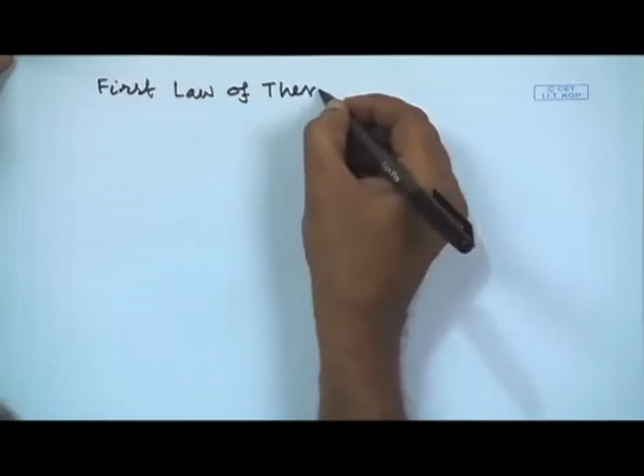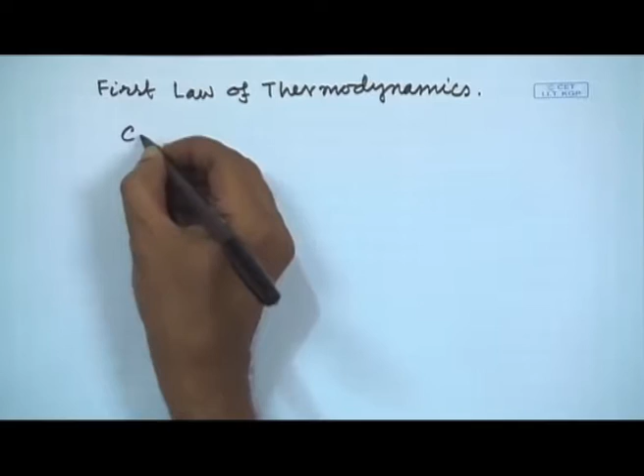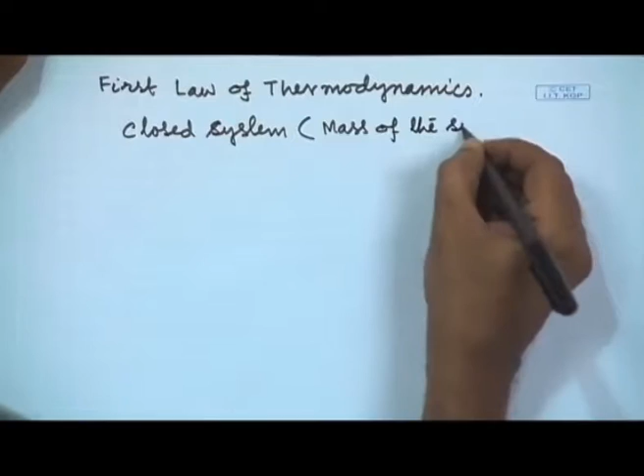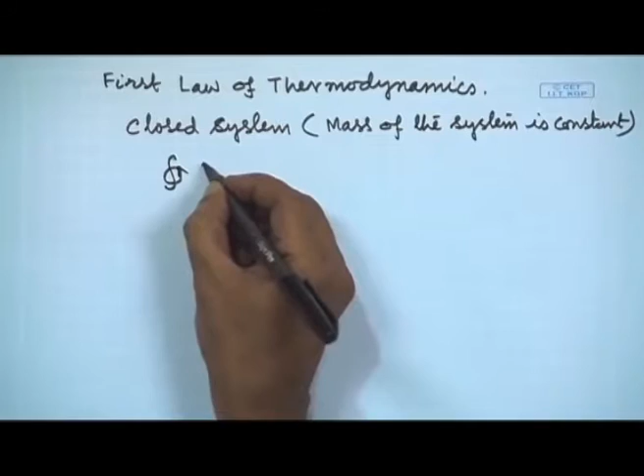First law of thermodynamics - first let us write the first law of thermodynamics for a closed system. For the closed system, the mass of the system is constant, because no mass can enter the system or no mass can leave the system. And then for a cyclic process, we can write: cyclic integral of heat transfer is equal to cyclic integral of work transfer. Q is heat and W is work.

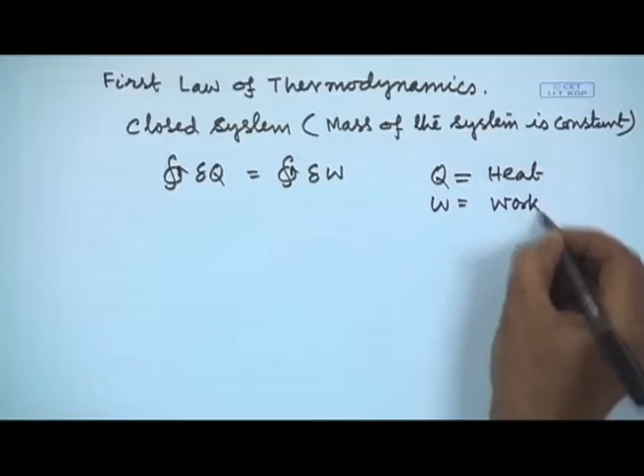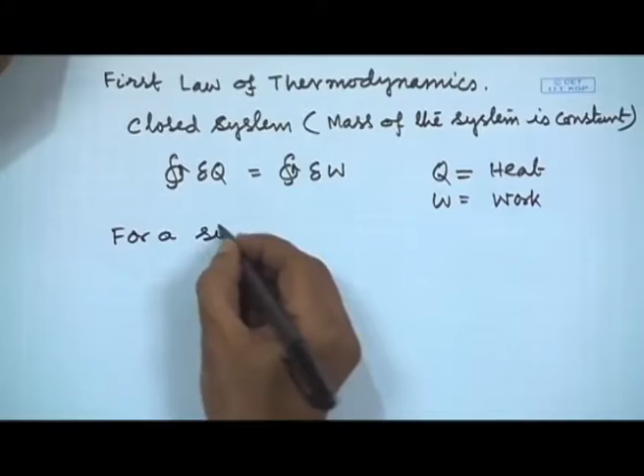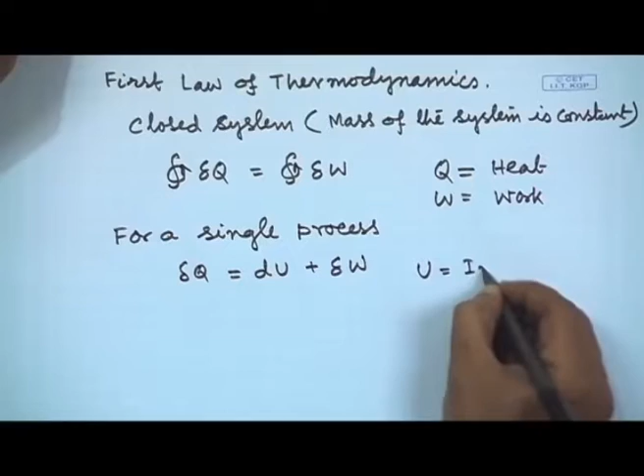If we take a single process, not a cyclic process, but a single process, in differential form we can write dq is equal to du plus dw, where u I have told is internal energy. And this is in the differential form.

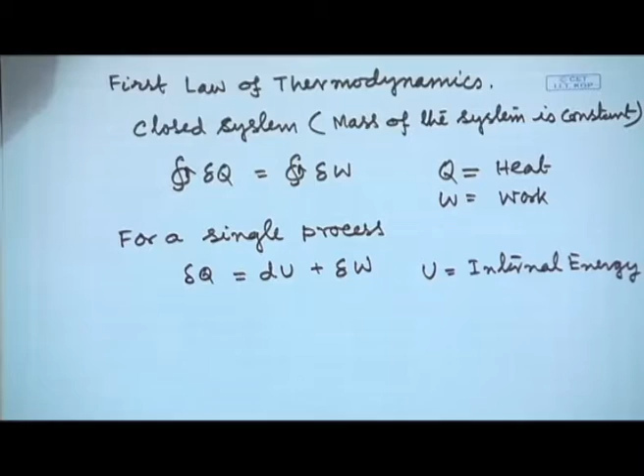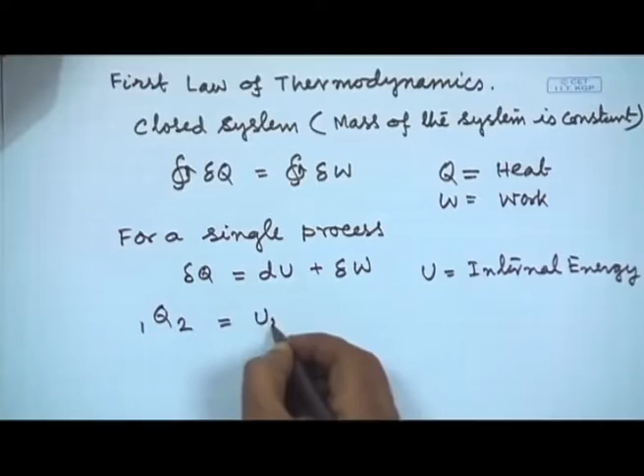If we consider a change of state from 1 to 2, one can write q 1 to 2 is equal to u 2 minus u 1 plus w 1 to 2. So here you see the difference. Here we have written q 1 to 2 to indicate the heat transfer during the change of state for the system from state 1 to state 2. Similarly, W 1 to 2 is the work transfer during the change of state for the system from 1 to 2, whereas U 2 is the internal energy of the system at state 2, U 1 is the internal energy of the system at state 1.

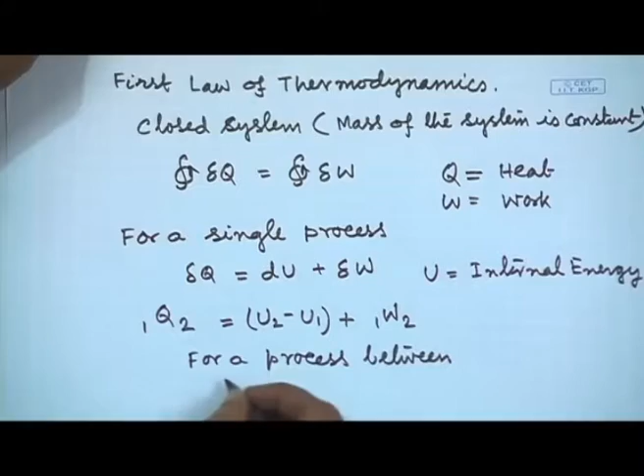So as U, the internal energy, is a property, we can write U 2 minus U 1 for a process undergoing between state 1 and 2, but as Q and W are path functions, we have to write Q 1 to 2 and W 1 to 2. So this particular equation is for a process between state points one to 2.

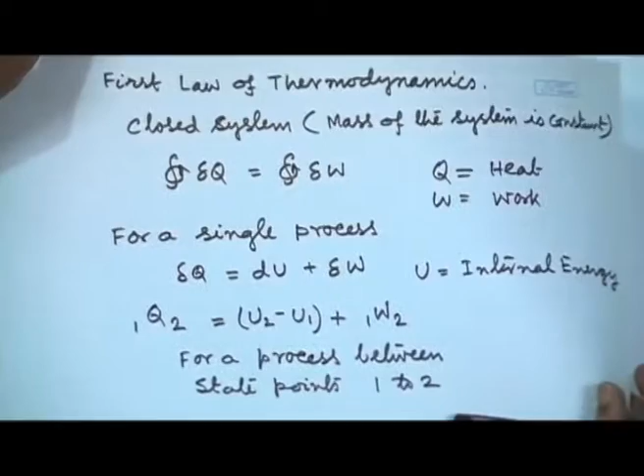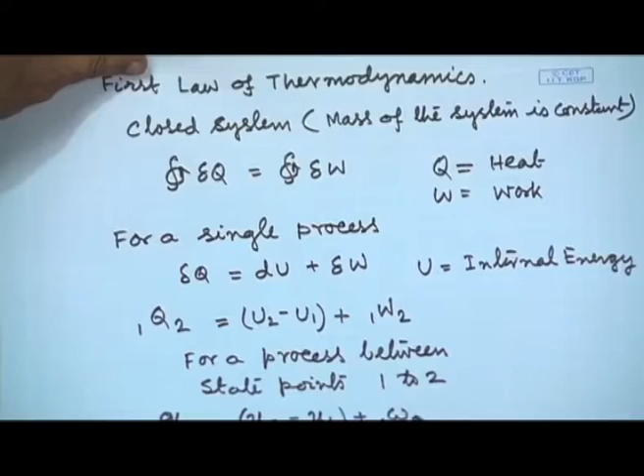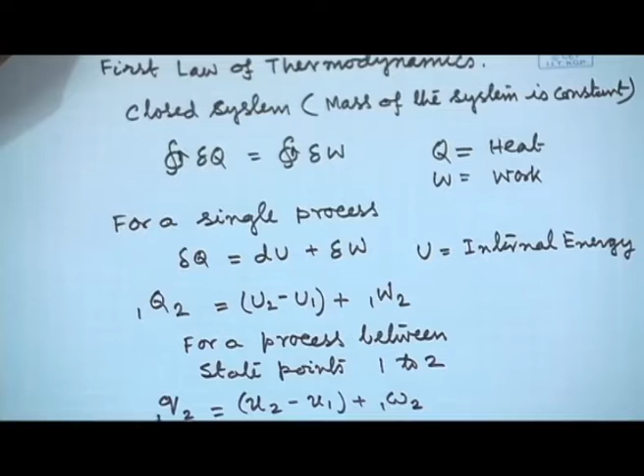We can write this equation also in terms of mass, as the mass of the system remains constant. So we can write per unit mass: q 1 to 2 is equal to u 2 minus u 1 plus w 1 to 2, where q and w are small letters denoting the amount of heat transfer per unit mass and amount of work transfer per unit mass, whereas U2 is the energy at state 2 per unit mass and U1 is the internal energy of the system per unit mass at state 1. So this is for a closed system or a system with a fixed mass.

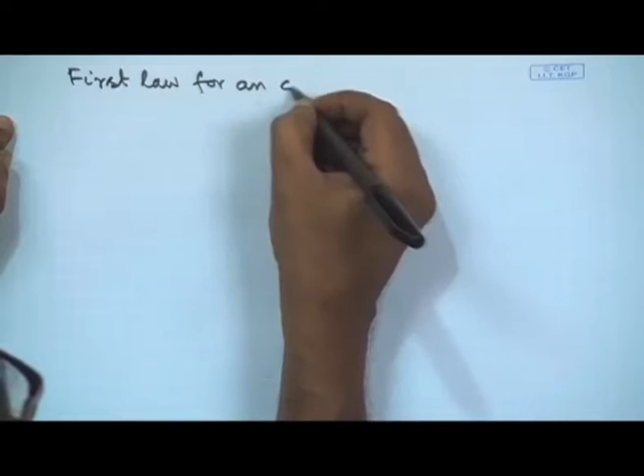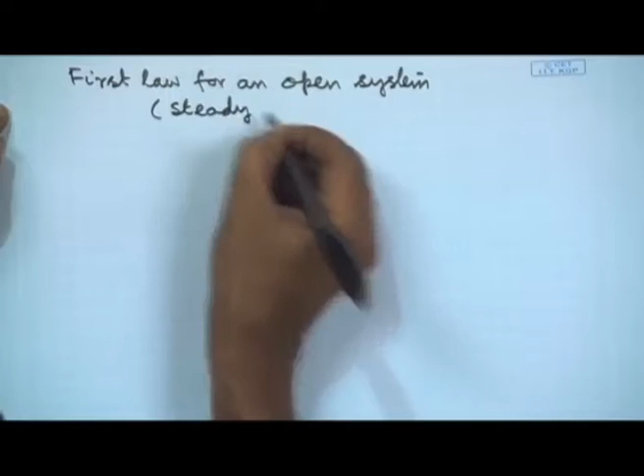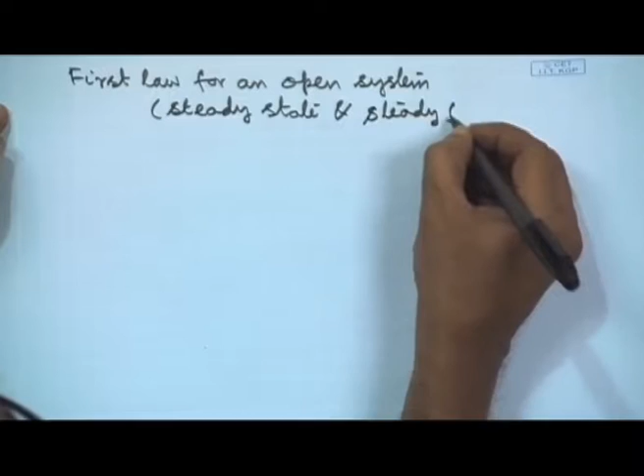Now, also we have written this equation for an open system - first law for an open system. Let me write it for steady state and steady flow. Again, I like to stress that steady state and steady flow is the most common kind of condition in most industrial situations. There are situations where there will be change of flow with time, change of state with time, but in general most industrial systems operate under steady state. We want to do the analysis under steady state, and so we are writing the equation for steady state.

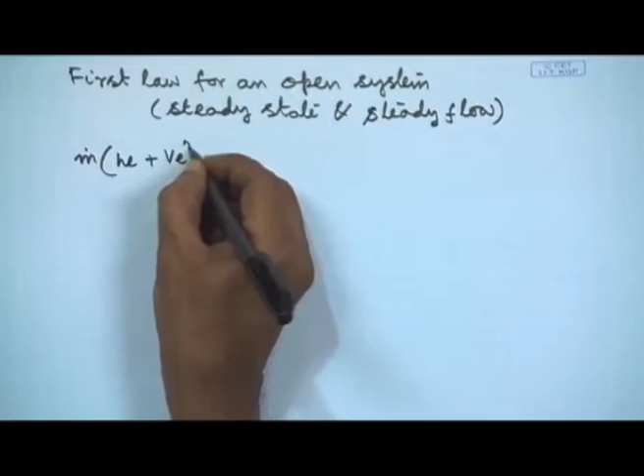And we can write: m dot times (H E plus V E squared by 2 plus G Z E), that is equal to m dot times (H I plus V I squared by 2 plus G Z I) plus Q dot minus W dot. Let me explain each of the terms.

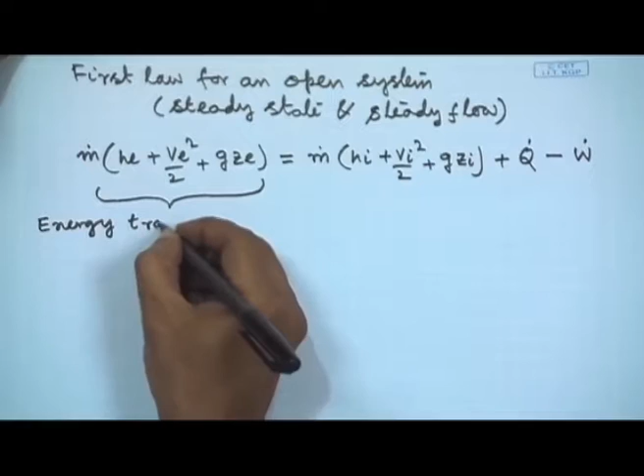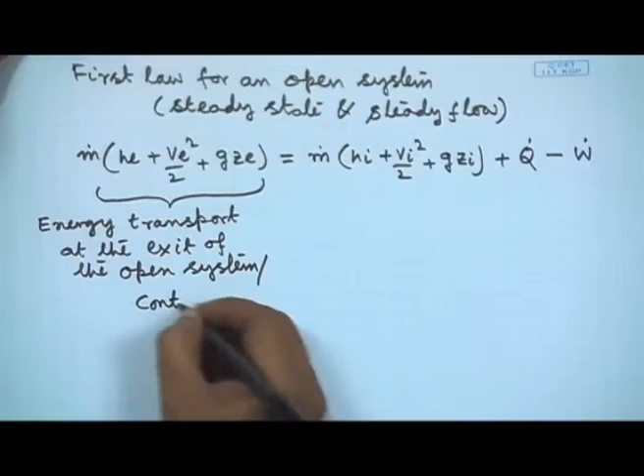The left hand side we have got energy transport at the exit of the open system, which is also known as control volume. This is energy transport at the entry of the control volume, short form CV.

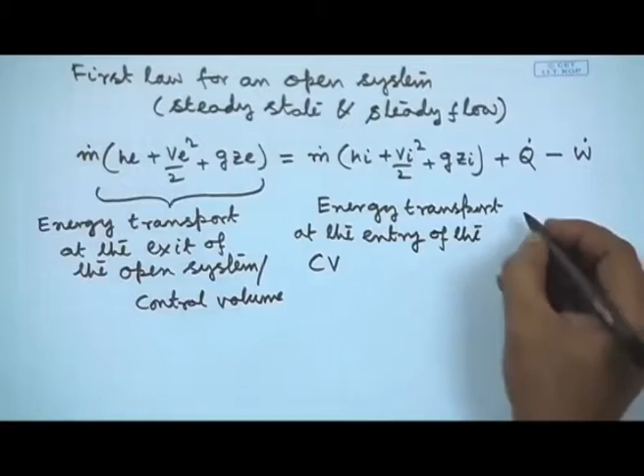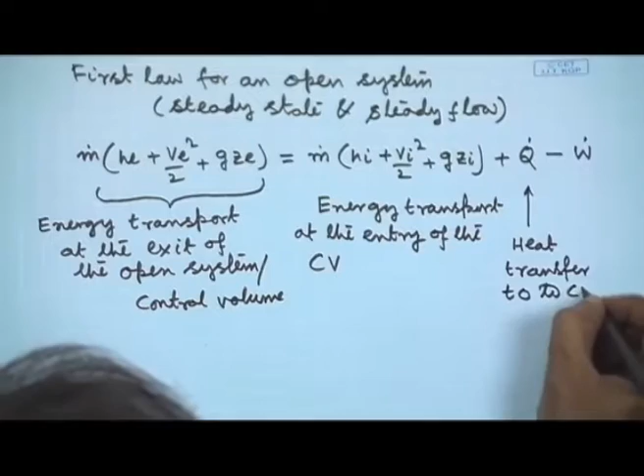Heat transfer to the CV, and this one, work done by the CV.

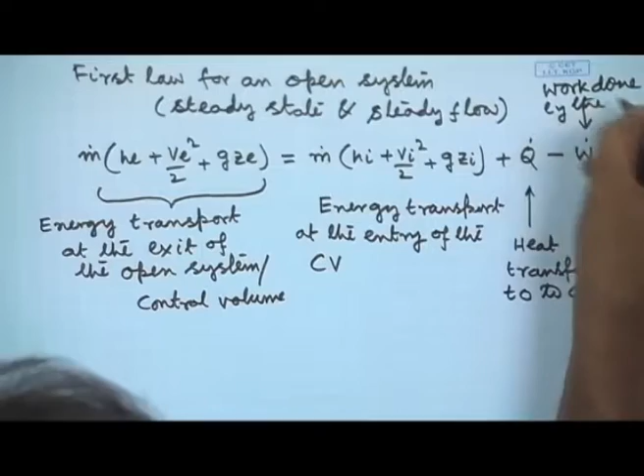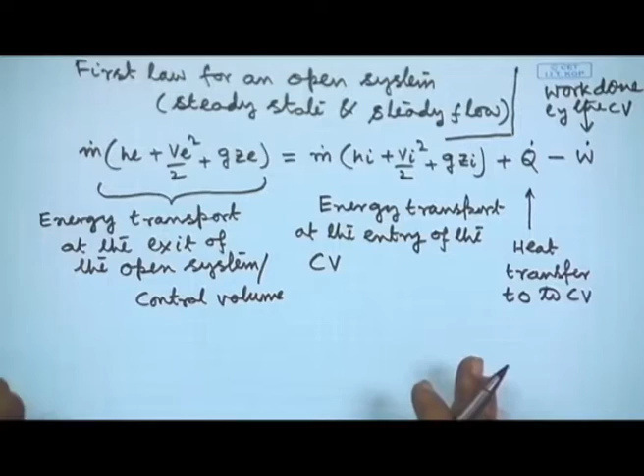So you see we are getting some sort of a balance of energy. Basically, we have to appreciate that this is a rate equation and we are getting some sort of a balance. On the left hand side, we have the rate of energy transport at the exit of the open system, that is equal to the rate of energy transport at the entry of the control volume or open system, plus the rate of heat transfer to the control volume, minus the rate of work done by the control volume. So this is how one can express the first law of thermodynamics for an open system or for a control volume.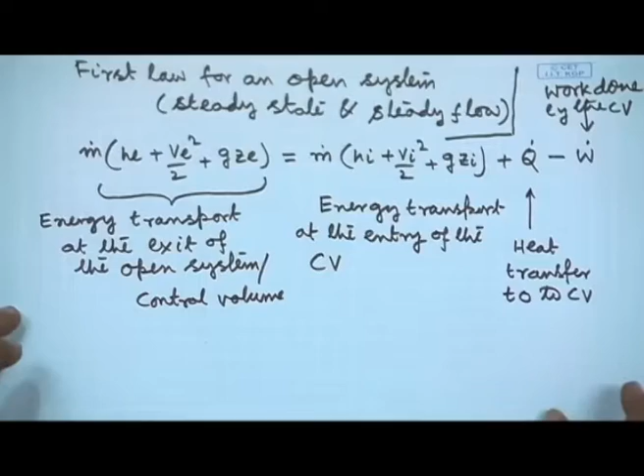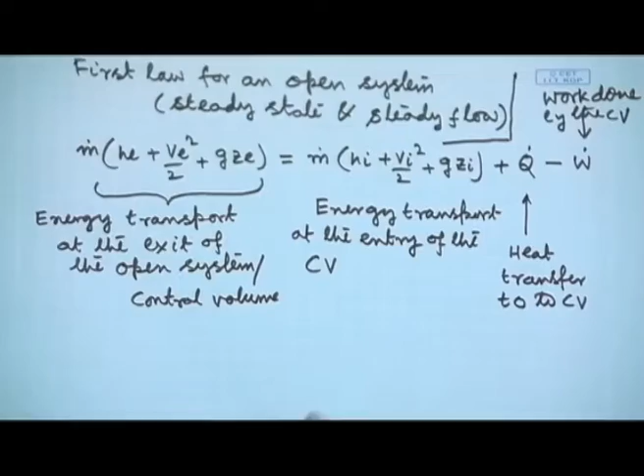Now, here we are considering steady state operation and we are considering only one inlet and one outlet. Mass is entering to the control volume through one opening and mass is leaving the control volume through a single opening. I think the terminologies are clear to you.

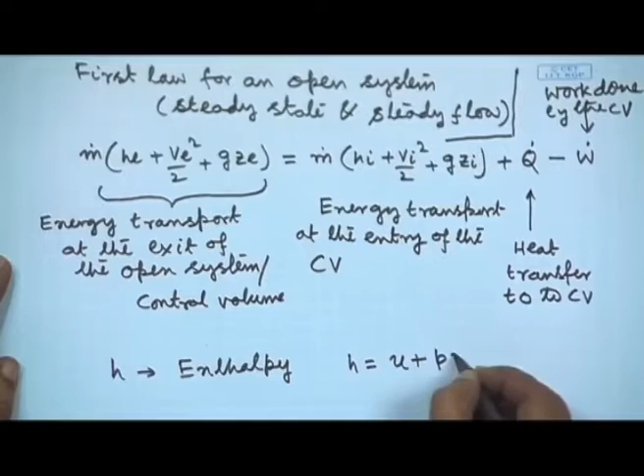H is called the enthalpy, already I have mentioned that. This is a property of the system, and H one can write as U plus P v, where U is the internal energy, P is the pressure, and v is the specific volume.

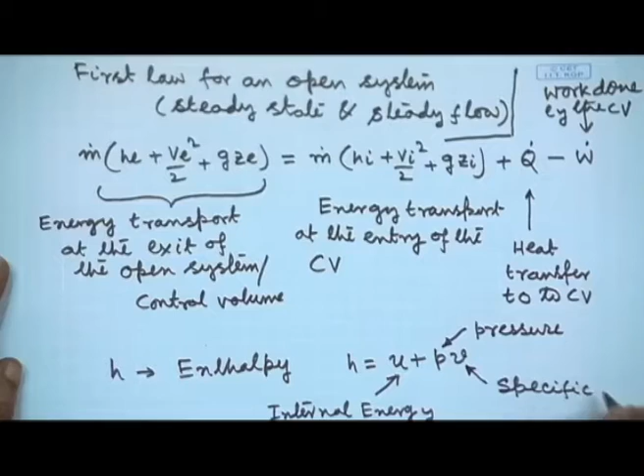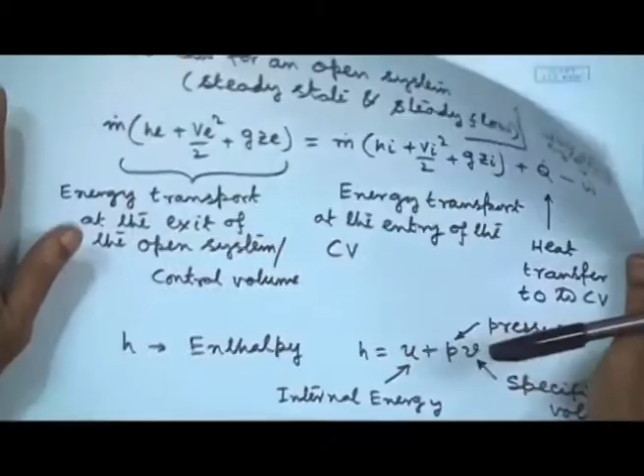So now at this point, let us see what we have got from the first law of thermodynamics. First law of thermodynamics, basically it is an energy conservation principle, and it shows how energy can be converted into different forms, and ultimately the conservation of energy is established or maintained. And it also introduces a new property of the system, that is called enthalpy, given by U plus P v. So this is the thing which we come to know from the first law of thermodynamics.

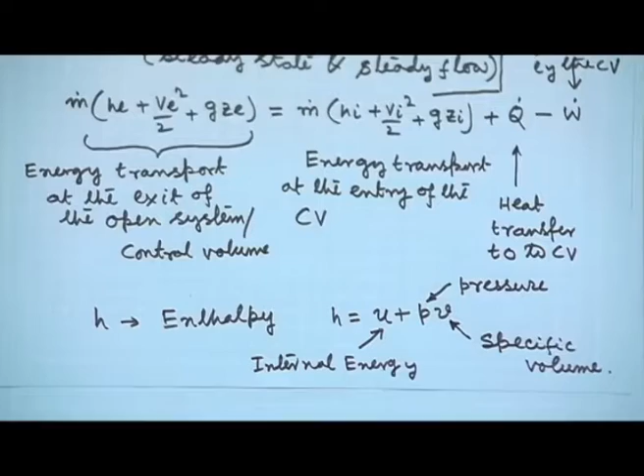For energy analysis of any system, particularly for waste heat recovery, the first law is of utmost importance, because it is a principle of nature, there will not be any violation of the law of energy conservation. And from this kind of equation, whatever we have derived, we will be able to analyze the waste heat recovery system, and we will take up certain examples to illustrate this.

We have written the equation for single inlet and single exit, but there could be systems with multiple inlet and multiple exit. In waste heat recovery, there are examples where we will have a system or control volume with multiple exit and multiple entry. So let us take one example.

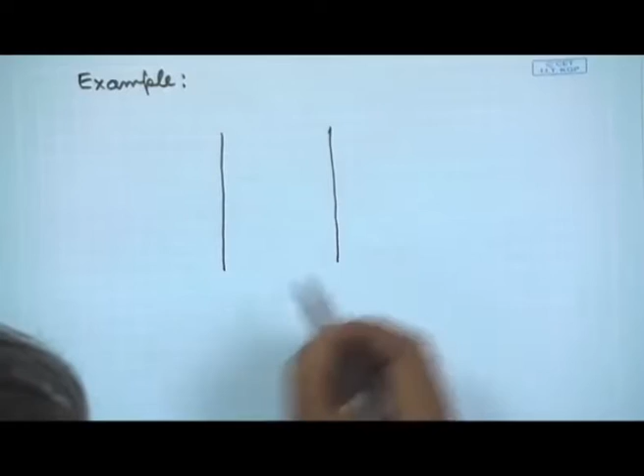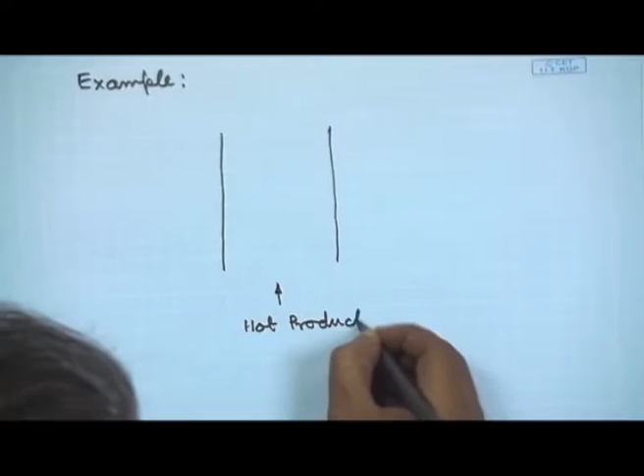So let us say we are considering one economizer. So what is an economizer? The hot product of combustion, that is the flue gas, passes through this duct.

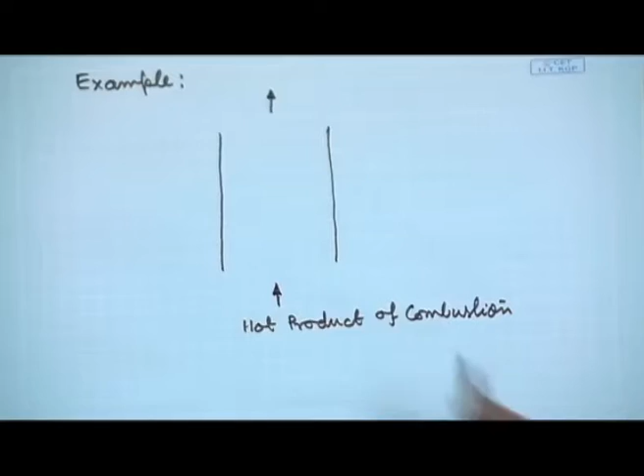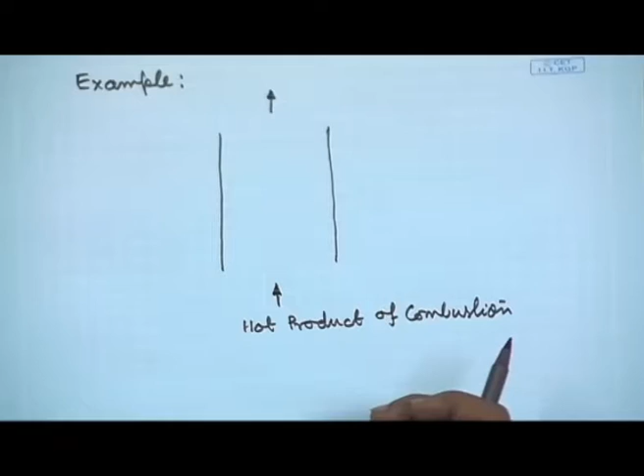One can think of this as part of the flue gas path. Maybe before this stack we have got this portion of the flue gas path, and as the hot gas passes through this, we can extract a certain amount of thermal energy out of it. There are different ways of doing it.

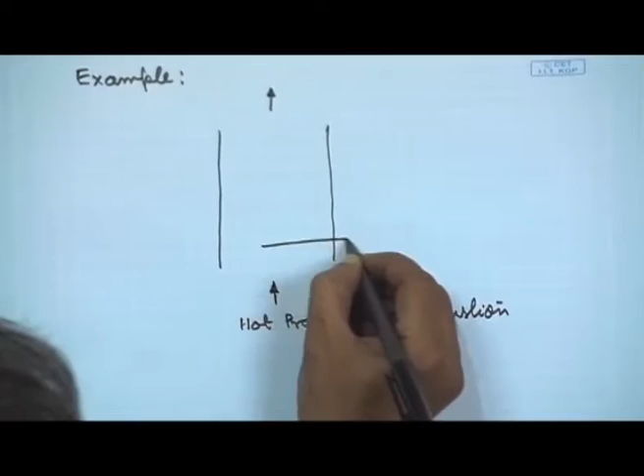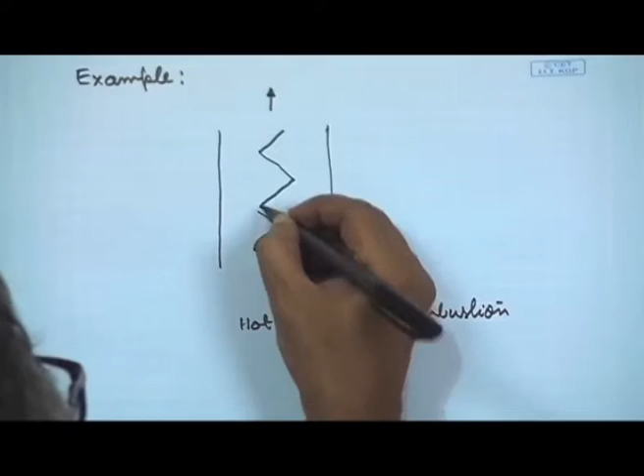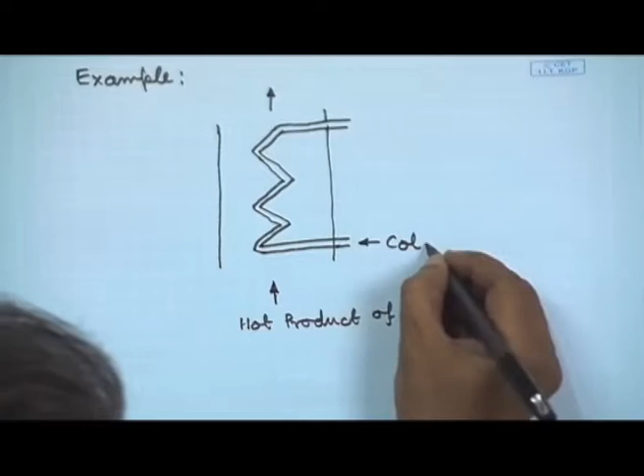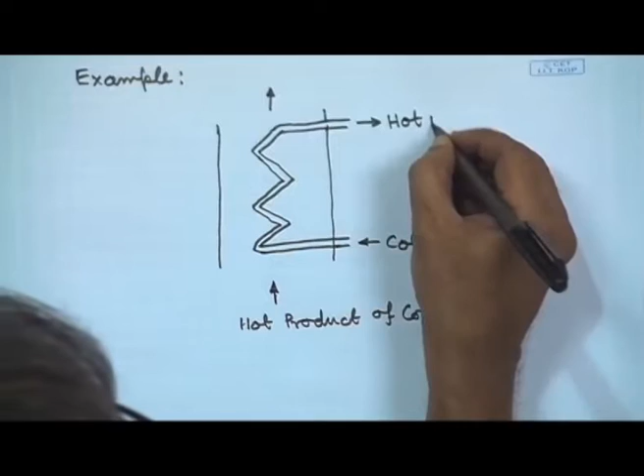One way of extracting thermal energy is that we can introduce a coil structure, something like this, shown schematically. So here cold water is entering, and when water comes out of this coil, this will be hot water. The temperature of the water will increase as it transfers heat, extracting heat from the hot product of combustion, the flue gas.

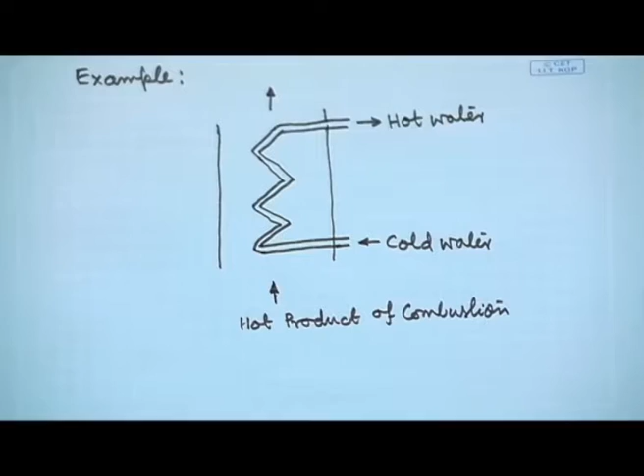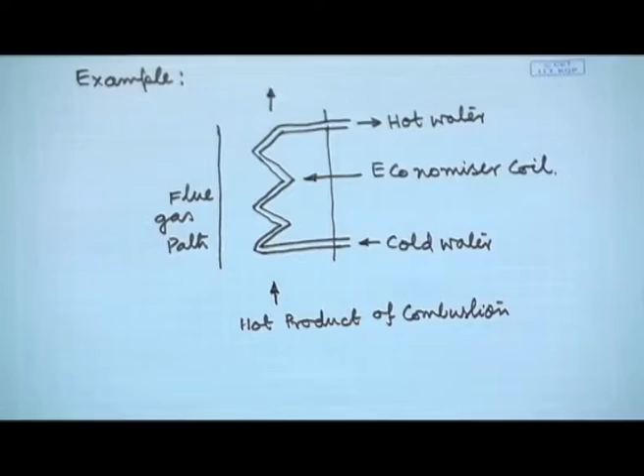So I can write this is the flue gas path, this is the economizer coil, and the direction of flow of the fluid has been shown. So I can do a first law analysis for this economizer coil.

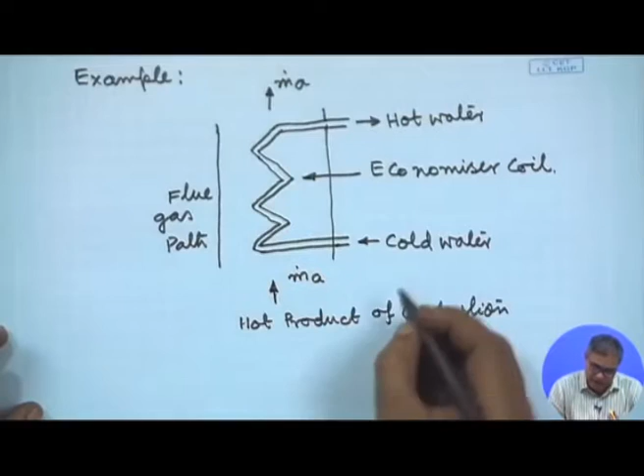So let us assume that mass of flue gas, that is m dot A, the same mass of flue gas is going out as m dot A. Mass of water, the mass flow rate of water, that is m dot W, and the same mass of water is coming out as m dot W. So how can we write this?

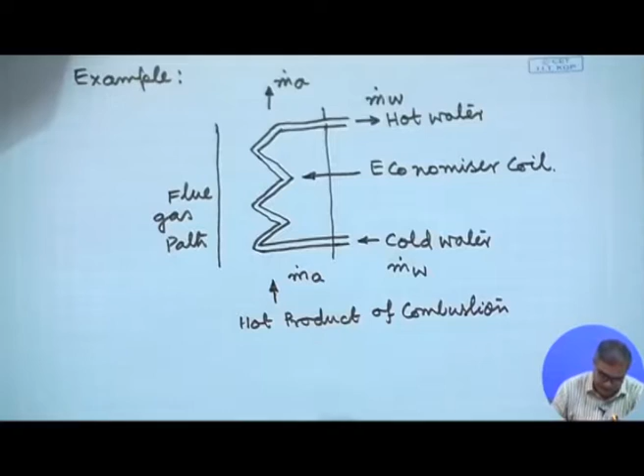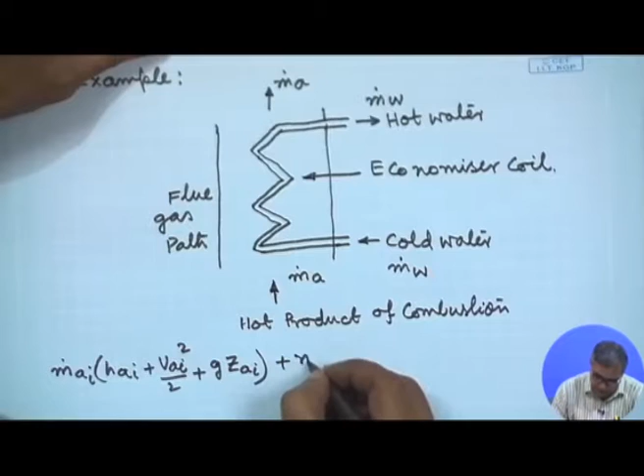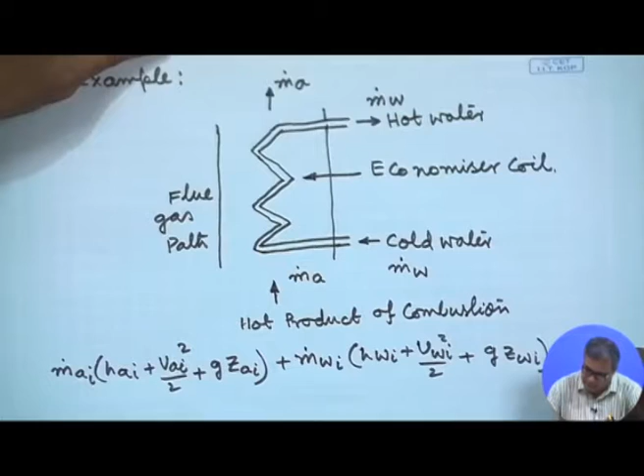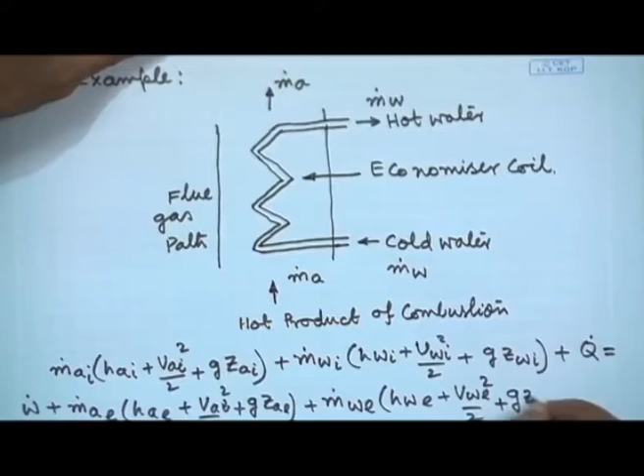Just thinking of the previous equation, we can write: m dot A I times H A I plus V A I squared by 2 plus G Z A I, plus m dot W I times H W I plus V W I squared by 2 plus G Z W I, plus Q dot, that is equal to W dot plus m dot A E times H A E plus V A E squared by 2 plus G Z A E, plus m dot W E times H W E plus V W E squared by 2 plus G Z W E. That is all.

So you see, m dot A I is the mass flow rate, and these are the enthalpy, velocity, and datum level, already explained, at the inlet of air and at the inlet of water stream. This is the enthalpy, velocity and datum level at the exit of air stream, and enthalpy, velocity and datum level at the exit of water stream. This is how we can write the equation.

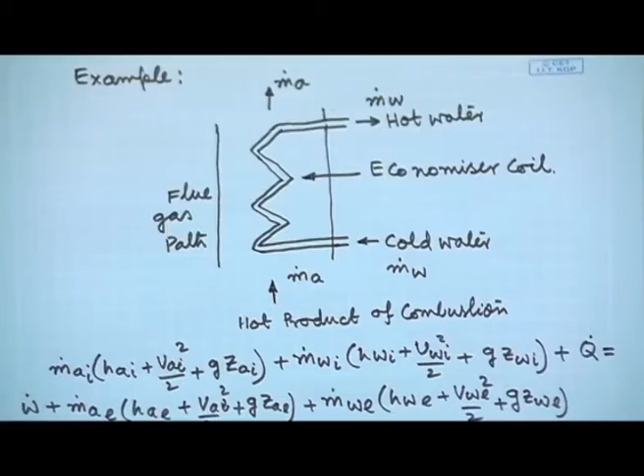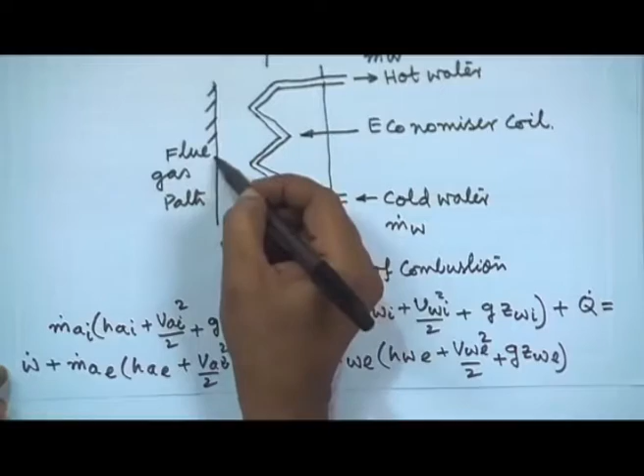Considering the physics of the problem, we can simplify this equation slightly. Let us now consider the flue gas path or the duct is well insulated. If it is well insulated, then there will not be any heat transfer either from the system to the surrounding or from the surrounding to the system. In practice, of course, this is an idealization, since this is hot gas and the duct wall will be heated up. So whatever may be the insulation, there will be certain amount of heat loss, but for the sake of analysis, let us assume there is no heat transfer from the duct to the ambient atmosphere.

So if that is so, then Q dot is equal to 0, and then there is no work done. Neither the gas stream is doing any work, nor the water which is flowing through the economizer coil is doing some work. So work done is also equal to 0.

So basically we will have some sort of an energy balance between the two streams. From our common sense we know what is the amount of energy released by the hot flue gas, that will be picked up by the water, and again we can do some further simplification. How can we do the further simplification? We can think that the enthalpy of air and enthalpy of the water will be reasonably large compared to the other energy terms, that is the kinetic energy term and the potential energy term.

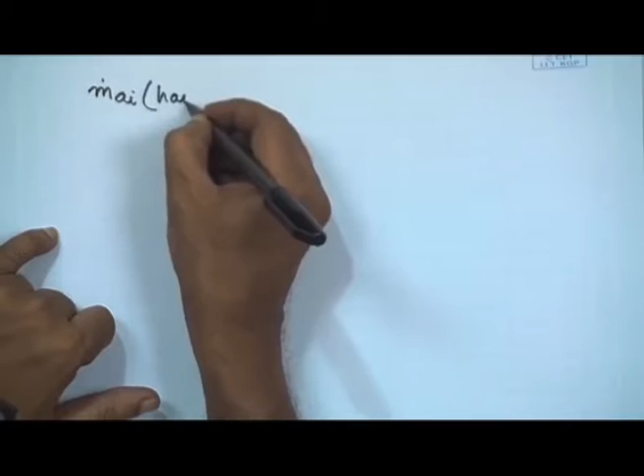M dot A I H A I plus M dot W I H W I, that is equal to M dot A E H A E plus M dot W E H W E.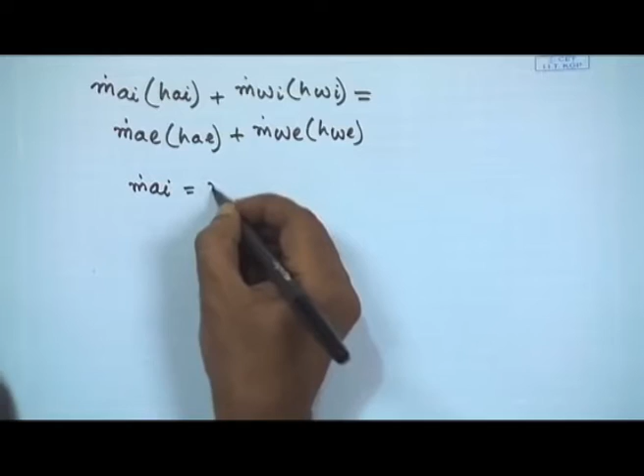Again, we should appreciate at this point that M dot A I is equal to M dot A E, that is equal to M dot A, and M dot W I is equal to M dot W E, that is equal to M dot W. So with this, if we further simplify, then we will get M dot A times H A I minus H A E, that is equal to M dot W times H W E minus H W I.

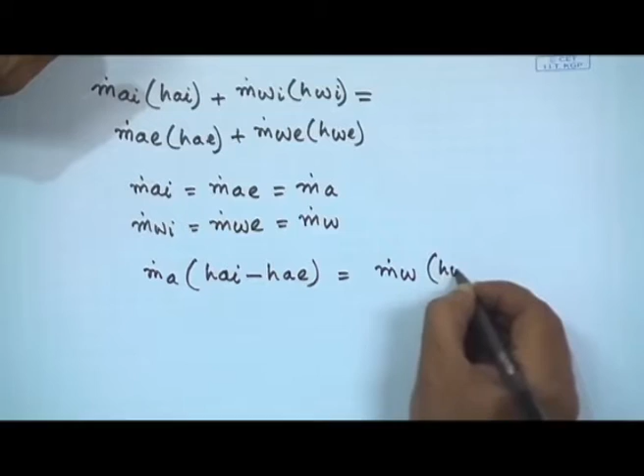So you see, starting from the general equation of first law, general expression of first law for an open system which has got 2 inlets and 2 exits, we have written this energy exchange equation, and now it is complying with our common sense, that whatever is the heat released by the flue gas, hot flue gas, that will be picked up by the water which is flowing through the economizer coil.

And the heat released by the flue gas is equal to mass flow rate multiplied by the change in enthalpy. Enthalpy has reduced, so that is why this will be a positive term, and heat rejected by the air stream or the flue gas stream will be a positive term. Similarly, this will be equal to the heat picked up, thermal energy picked up by the water stream, given by the mass flow rate of the water stream multiplied by change in enthalpy.

Now, how to determine the enthalpy? Most of you might have some idea. We will discuss how to determine the enthalpy. So in this case, you see what we can do from thermodynamics.

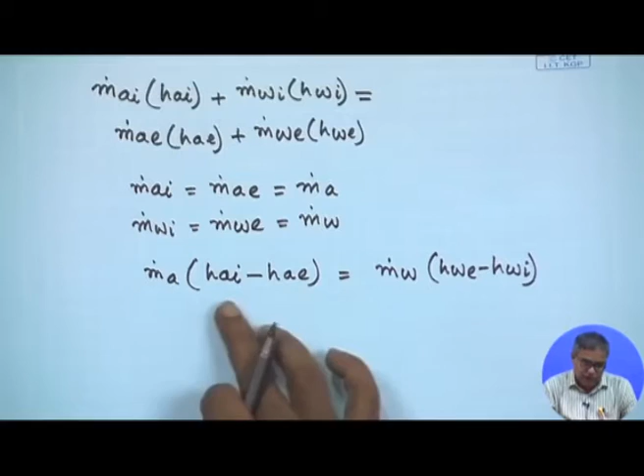Let us say we know the inlet condition of the flue gas and inlet property, that is the enthalpy of the flue gas. We know the outlet property of the flue gas. So then we know the enthalpy change of the flue gas, mass flow rate of the flue gas is also known, mass flow rate of water stream is known, and inlet temperature of water is known. So we can determine the outlet temperature of the water.

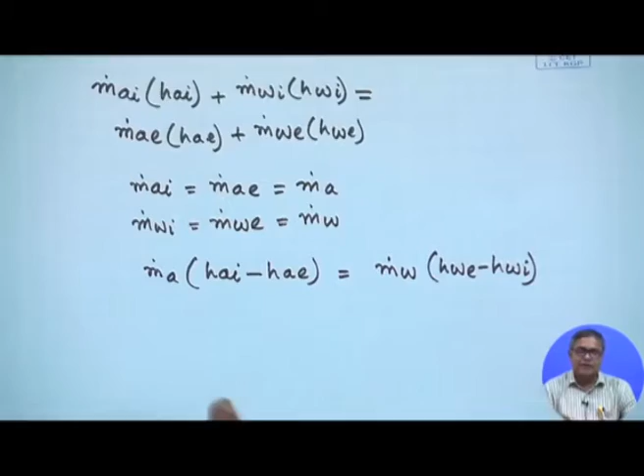So suppose if I plan to have some sort of an economizer and like to utilize part of the energy which is taken away by the flue gas, which would otherwise be released to the atmosphere, we want to utilize it. We can have this kind of a system, and from the first law we can analyze how much energy we can extract.

A deeper analysis can be done when we include heat transfer. If we know the velocity and geometry of the coil, etc., we can find the rate of heat transfer. Then if we know the inlet conditions of the flue gas and water stream, along with their mass flow rates, we will be able to find out the rate of heat transfer and how much heating can be done to the water stream.

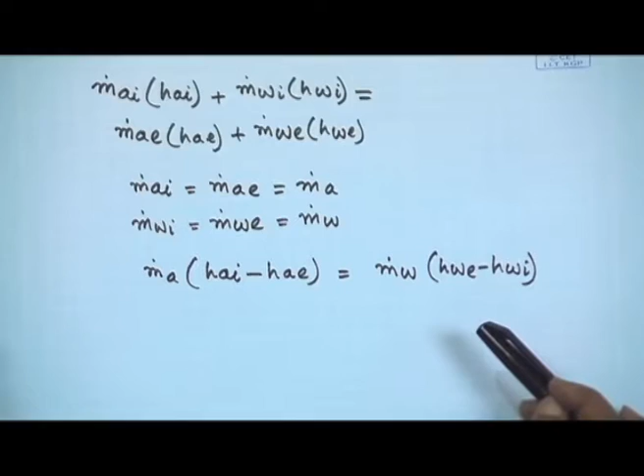So, by applying the first law of thermodynamics, we have proceeded one step towards analyzing or designing a waste heat recovery system. Again, if we apply the laws of heat transfer, we will be able to do a much better analysis and size the economizer coil. As I mentioned in a previous lecture, thermodynamics and heat transfer are very important. We can understand from this example how thermodynamic principles can be utilized for analyzing the waste heat recovery system.

With this, let us move to the second law of thermodynamics. I will not go into the full details as covered in a thermodynamics course; I will give the salient features. Let us first see what we get from the second law. The first law gives us an idea of the quantity of energy exchange during a process of energy conversion. The second law gives something more—many important pieces of information in addition to the first law.

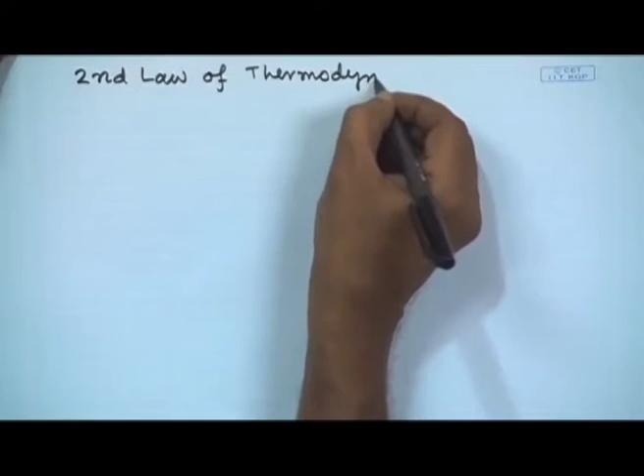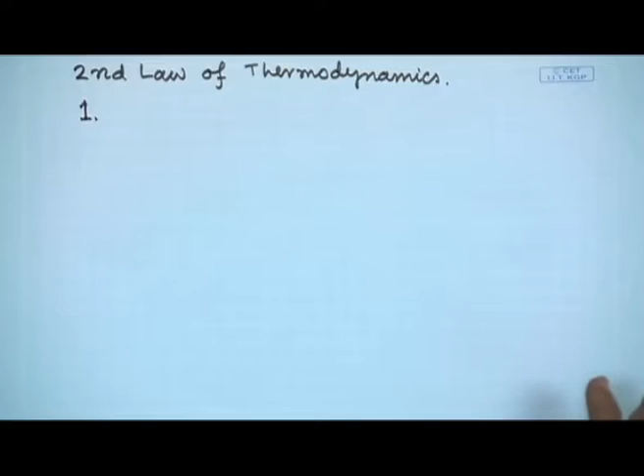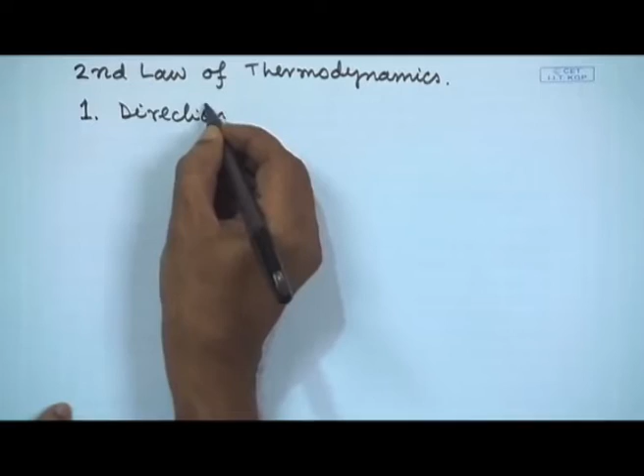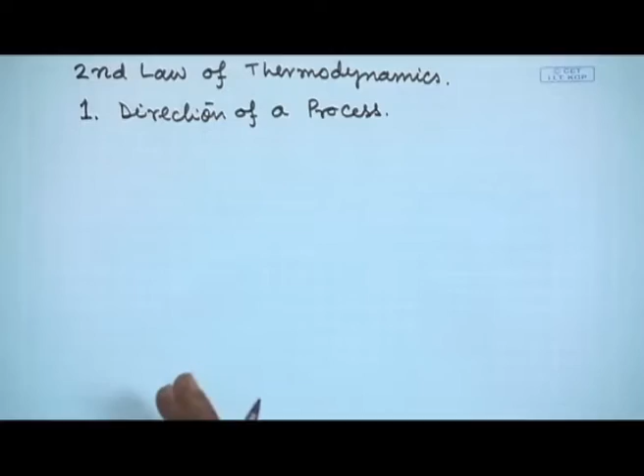So, let us discuss the second law of thermodynamics. It gives us many important pieces of information, most of which will be directly applicable for the design and analysis of a waste heat recovery system. The first thing we get is the direction of a process. Processes which occur in nature and in industry have a preferred direction, and the second law gives us this direction.

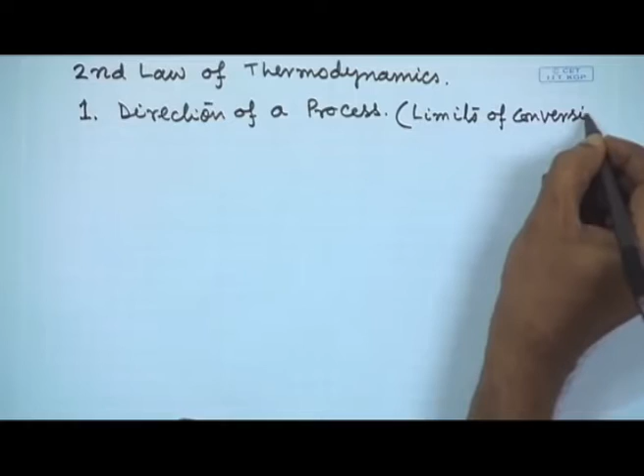This can also be described as giving limits of conversion. This needs a little explanation. Let us say we are converting one form of energy in transit to another—from work to heat, and then trying the conversion of heat back to work. How much of a given amount of work can be converted into heat, that we can get from the second law. And if there is a given amount of heat transfer, how much of it can be converted into useful work, that also we can get from the second law.

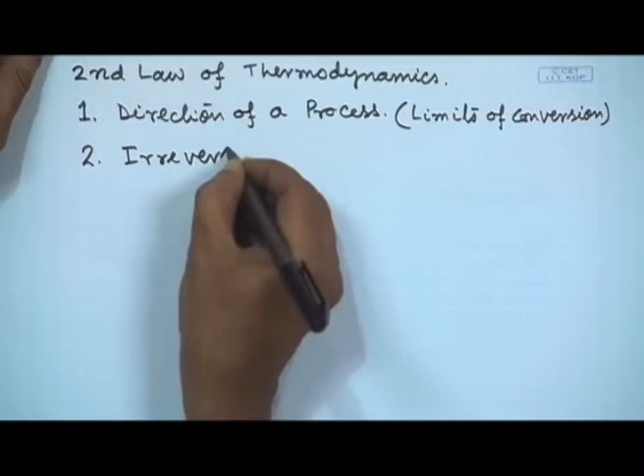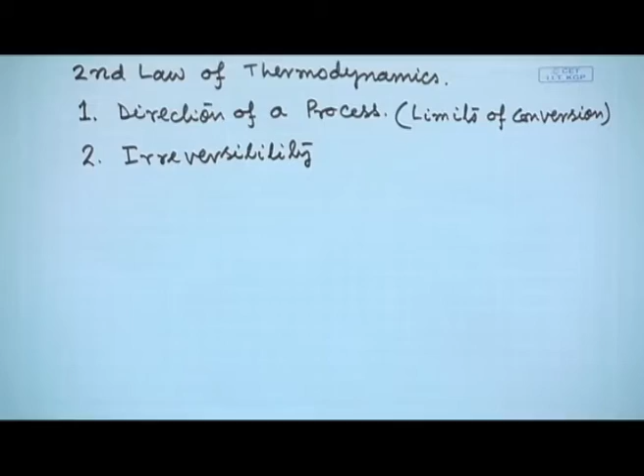Then the second law gives another piece of information, which is irreversibility. The concept of irreversibility is introduced by the second law. The first law of thermodynamics does not quantify whether a process can proceed forward and then be made to proceed backward in the same way without creating any change elsewhere—that is not addressed by the first law. But the second law tells us whether a process can be reverted back, with the system taken back to its initial state without creating any change in the environment.

So, if irreversibility is involved in any process, it cannot be reverted back without making some change elsewhere. If it is a reversible process, then only it can be reverted back. This gives us the very useful concept of irreversibility, which is important for knowing how much we can expect from a process, and how we can make the best of a process by reducing irreversibility. These things are not possible from the first law of thermodynamics, but they are possible from the second law.